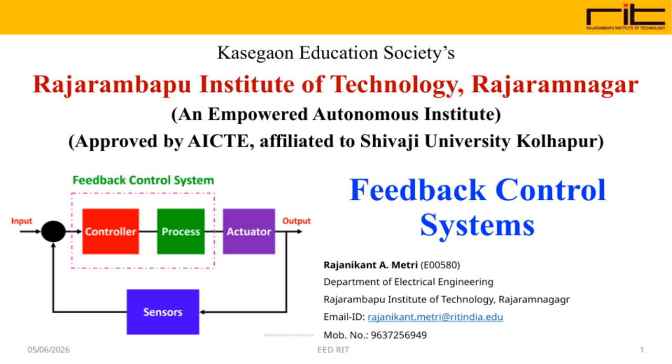Today, we're diving into control system engineering. It's a field that's all about designing and managing systems that keep things running smoothly, from simple thermostats to complex industrial processes. We'll explore the principles and tools that help engineers maintain stability, accuracy, and efficiency in these systems. This sets the stage for everything that follows in our discussion.

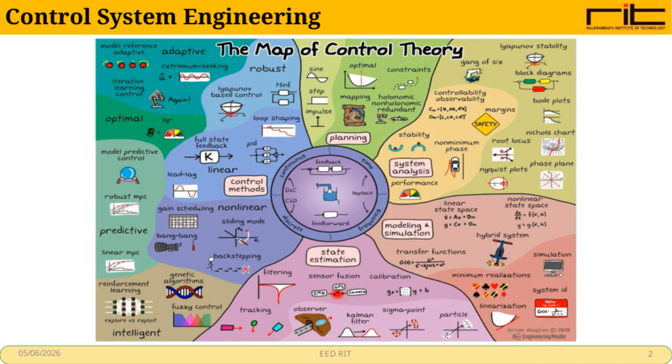Let's get started. In this session, we're diving into the core of feedback control systems. By the end, you'll be able to translate physical systems into mathematical models, a crucial first step.

We'll also calculate time domain specifications for second-order systems and analyze various systems using both time and frequency domain tools. You'll learn to compare different controllers and compensators and apply state-space techniques to understand complex MIMO systems. This foundation sets us up for deeper exploration ahead.

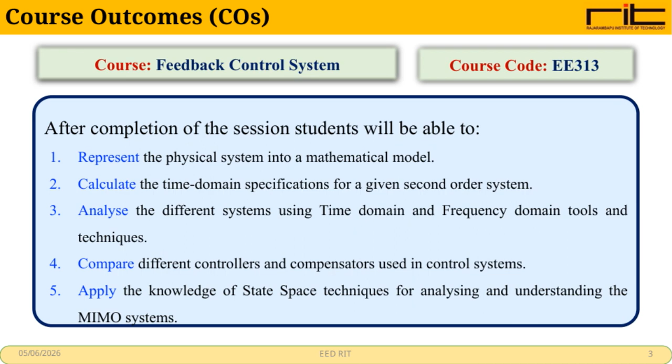Let's take a look at the course structure for our study on control systems. We start with an introduction, covering the basics, the importance of control systems, and key components like sensors and actuators.

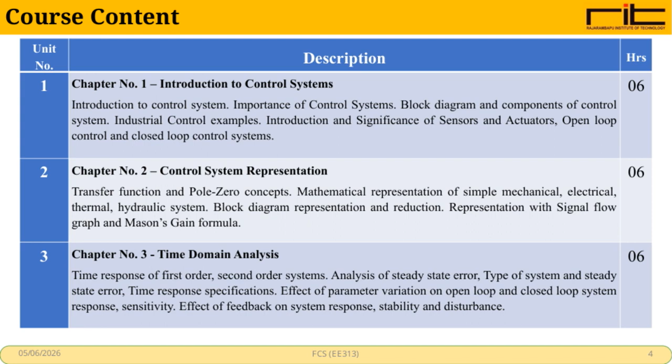Then, we move into system representation, exploring transfer functions and block diagrams. After that, we dive into time domain analysis, focusing on system responses, errors, and stability. Each unit is designed to build on the last, giving us a solid foundation over 6 hours per chapter.

Before we dive into these units, it's important to have a solid grasp of differential equations, Laplace transforms, signals and systems, and circuit theory. These topics build the foundation we'll rely on.

Now, we're covering 3 key chapters. First, stability, understanding how pole zero locations affect it, and tools like the Routh-Hurwitz criterion and root locus method.

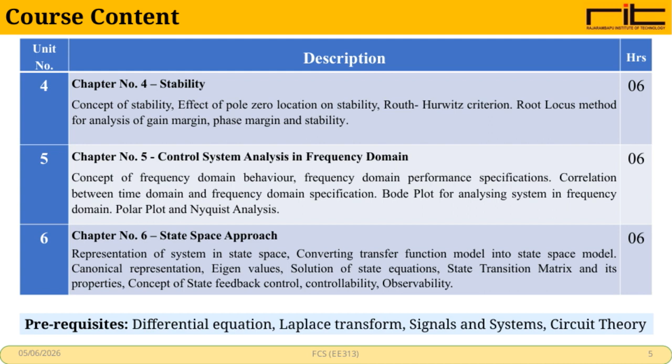Next, frequency domain analysis, exploring Bode plots, Nyquist analysis, and how frequency and time domain specs relate. Finally, the state space approach, representing systems in state space, solving state equations, and concepts like controllability and observability. Each unit is designed to give us 6 hours of focused study.

Let's talk about why control systems matter. They're everywhere, from the cars we drive to the devices we use every day. Studying them helps us understand how to make machines behave the way we want, reliably and efficiently.

It's about mastering feedback, stability, and precision. Whether it's robotics, aerospace, or manufacturing, control systems form the backbone that keeps everything running smoothly. So, diving into this field opens up a world of possibilities.

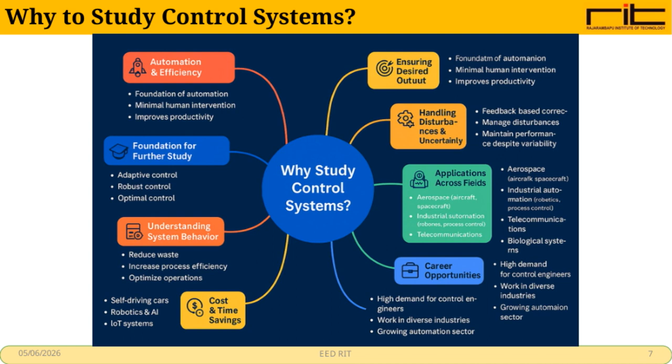Let's take a look at the industries where control system engineers play a crucial role. From chemical plants to pharmaceuticals, these experts keep complex processes running smoothly. They're also vital in aerospace and automotive sectors, where precision and safety are non-negotiable. Whether it's a PLC or DCS system, these engineers ensure everything operates efficiently and reliably across a wide range of industries.

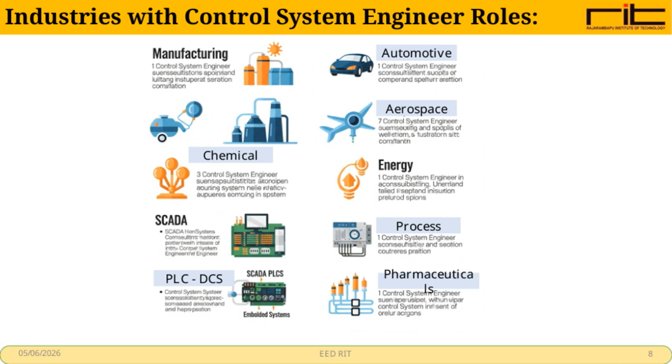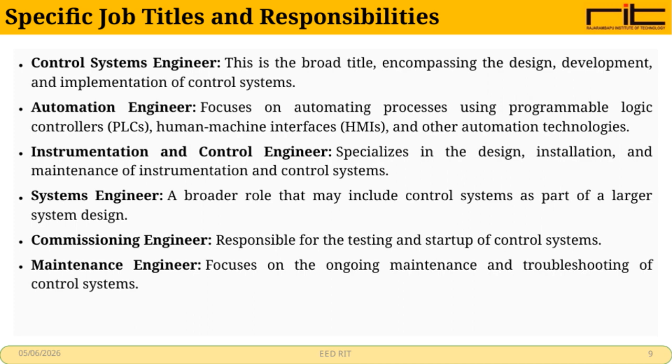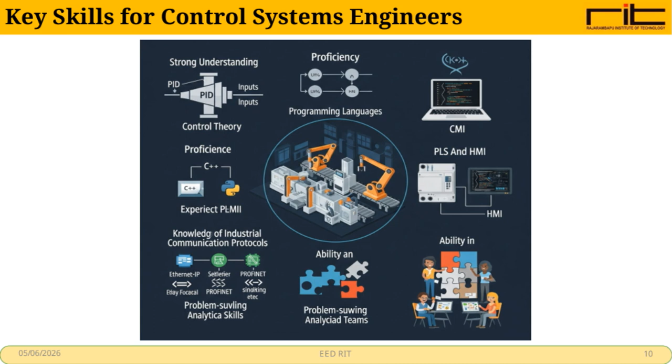Let's begin with Unit 1, an introduction to control systems. This is where we lay the groundwork for everything that follows. We'll explore the basic ideas behind how control systems work, why they matter, and how they're used in engineering. Think of this as setting the stage, getting familiar with the key concepts before we dive deeper into the details. It's the first step on our journey through the fascinating world of control systems.

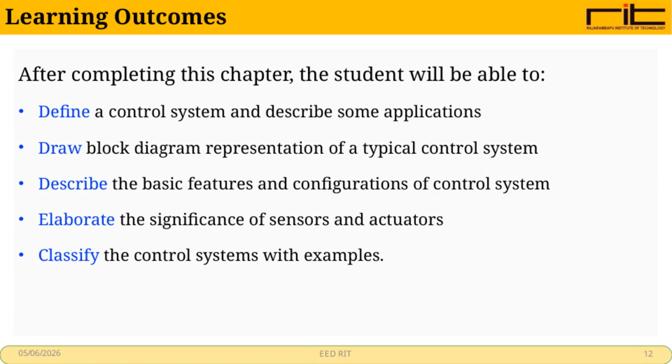By the end of this chapter, we'll have a solid grasp on what a control system really is and where you might see one in action. We'll learn how to sketch a block diagram, a simple way to visualize how these systems work. We'll also explore the key features and different setups control systems can take. Plus, we'll dive into why sensors and actuators matter so much. Finally, we'll classify control systems with examples to bring it all to life.

Let's start by outlining what we'll cover today. We'll begin with an introduction to control systems, what they are and why they matter. Then, we'll look at the basic block diagram and key components that make these systems work. We'll explore some real-world industrial control examples. Finally, we'll dive into sensors and actuators and explain the difference between open-loop and closed-loop control systems. This roadmap will guide us through the essentials of control technology.

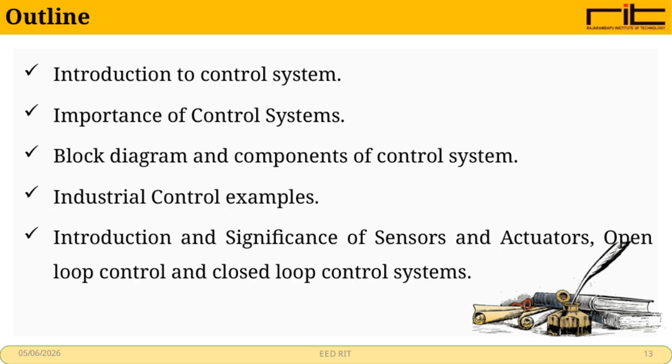Let's talk about control systems, the backbone of how machines and devices manage their actions automatically. A control system is any setup that regulates events or outputs to achieve a desired response. Think about everyday examples: traffic lights directing cars, washing machines running cycles, or thermostats keeping your home comfortable. It's also in advanced tech like cruise control in cars, anti-lock brakes, and even robotic surgeons. From simple switches to complex systems like PLCs and SCADA, control systems keep things running smoothly and safely.

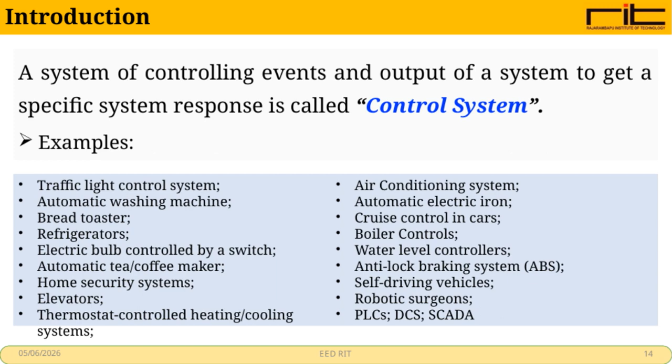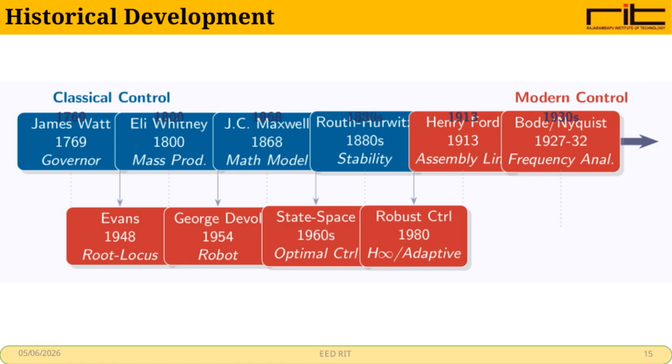Let's take a moment to look back at the historical development behind this project. Understanding where we started helps us see how far we've come, the challenges we faced, the breakthroughs we made, and the lessons we learned along the way. This context sets the stage for everything that follows, giving us a clearer picture of why today's approach matters so much. Let's take a quick journey through the history of control and automation.

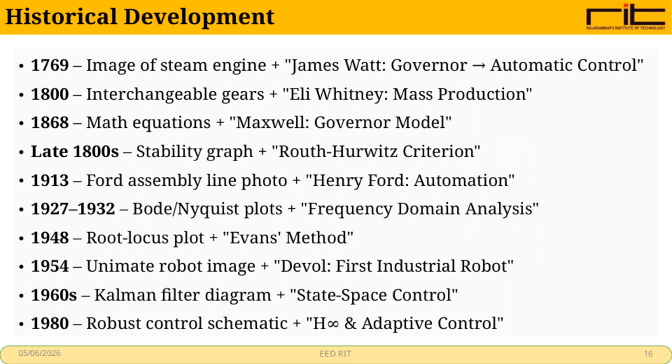It all started back in 1769 with James Watt's steam engine governor, an early form of automatic control. Then, in 1800, Eli Whitney introduced interchangeable gears, paving the way for mass production. Over the years, mathematical models and stability criteria emerged, like Maxwell's governor model and the Routh-Hurwitz criterion. By the early 1900s, Henry Ford revolutionized manufacturing with the assembly line. The mid-20th century brought frequency domain analysis, root locus plots, and the first industrial robot. Finally, by the 1980s, advanced methods like robust and adaptive control were shaping the future.

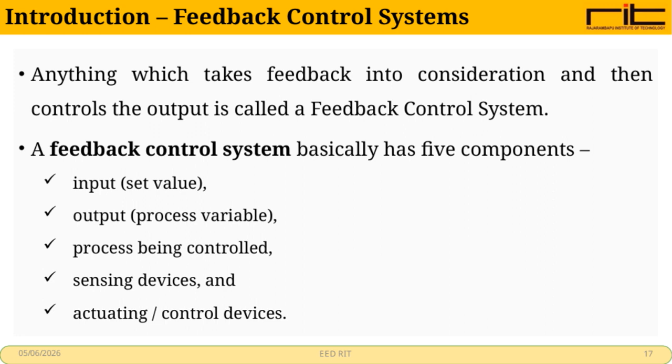Let's dive into feedback control systems. These are systems that adjust their output based on feedback they receive. At their core, they have 5 key parts. First, the input, that's the set value or the target we want. Then, the output, which is the actual process variable we're trying to control. Next, the process itself, what's being controlled. We also have sensing devices that monitor the output, and finally, actuating or control devices that make adjustments. Together, these parts keep the system on track.

Let's take a moment to introduce what's coming next. This section sets the stage for everything we'll explore today. It's all about understanding the essentials, the foundation we'll build on together. So, get ready to dive in and see how these ideas connect and unfold.

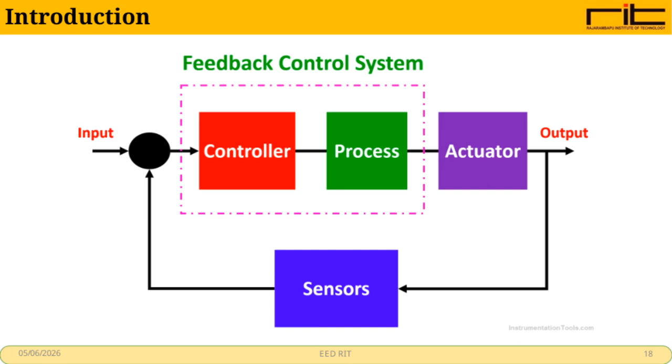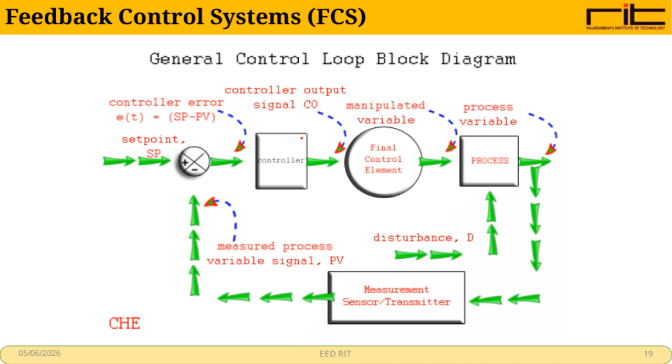Let's dive into feedback control systems, or FCS for short. These systems are all about keeping things on track by constantly measuring output and adjusting inputs. Think of it like a thermostat. It senses the temperature and switches the heat on or off to keep your room comfortable. Feedback control is everywhere, from engineering to biology, helping systems stay stable and perform as expected. Understanding this concept is key to mastering how complex processes regulate themselves.

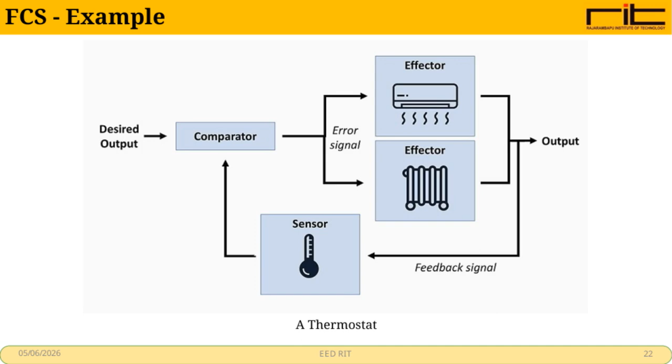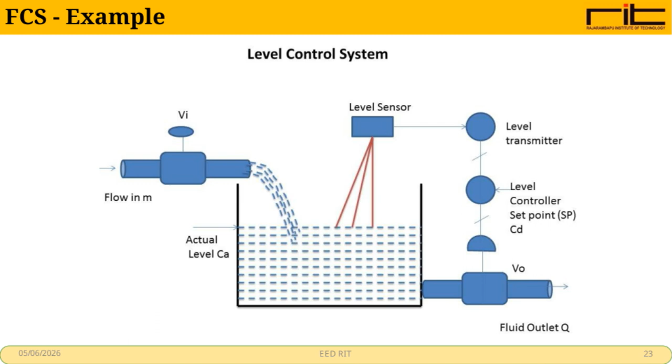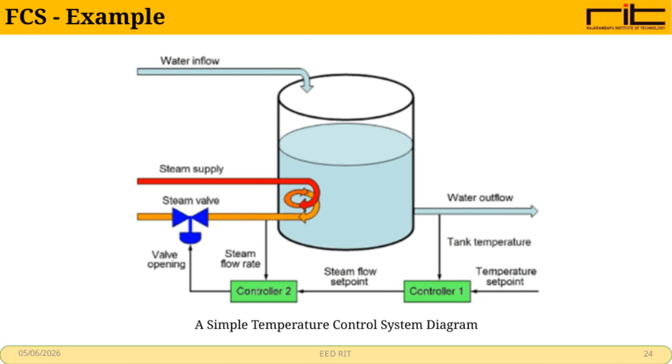Let's start by breaking down some basic terms we'll use throughout this talk. First, a plant, system, or process is basically a series of steps or activities arranged in order to control material and turn it into a final product. It can also mean any physical thing we want to control, like a robot, a car, or even a classroom.

Next, process variables are the physical quantities we track to understand how the process is doing, things like temperature or pressure. Measured variables are the outputs we monitor closely, using sensors to keep everything on track. Manipulated variables are what we adjust to control those outputs. And finally, the reference value, or set point, is the target we want our measured variables to hit.

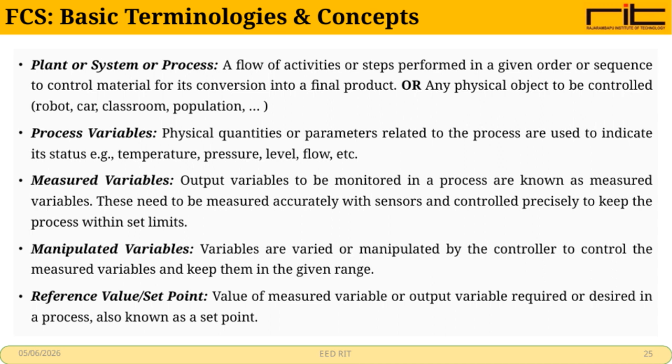Let's start by breaking down some key terms we'll be using. First, a sensor. It's any device that measures the size or intensity of something we want to control. It detects a physical quantity and gives us an output related to that measurement.

Next, a transducer. This converts the sensor's output into a form that's easier to work with, often turning it into an electrical signal. Then we have the transmitter, which sends this signal from the sensor over to the controller. Finally, error. That's the difference between what the sensor measures and the reference value.

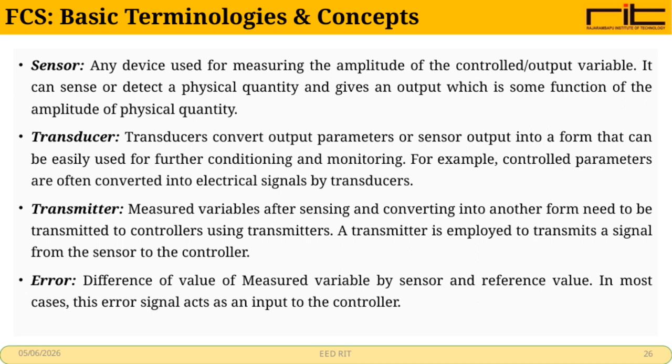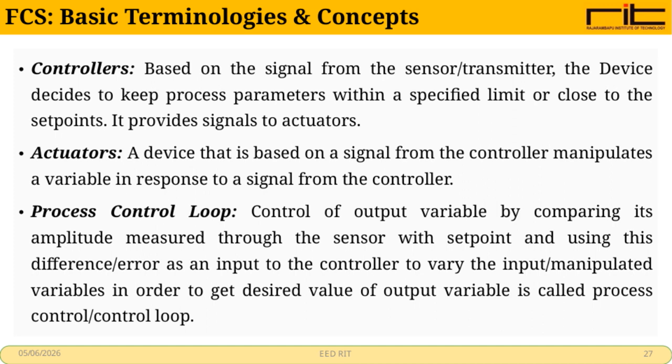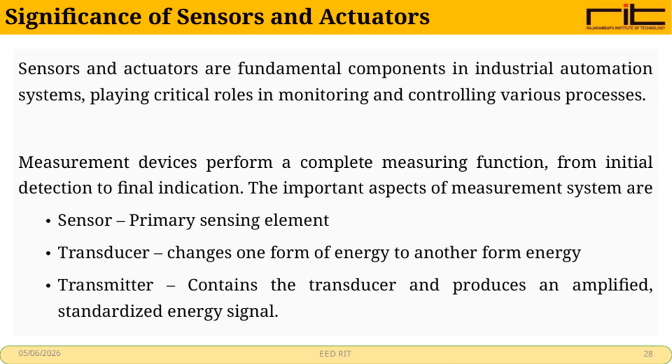Then comes the transducer, which converts one form of energy into another. Finally, the transmitter takes that signal, amplifies it, and standardizes it for further use. Together, these components keep complex systems running smoothly and efficiently.

Now, let's turn our attention to sensors. These devices are the eyes and ears of any system, gathering data, detecting changes, and feeding information back to us. Whether it's temperature, motion, or pressure, sensors help us understand the environment in real time. They're essential for making smart decisions, automating processes, and improving safety.

In this part of the presentation, we'll explore how sensors work and why they're so important to our project.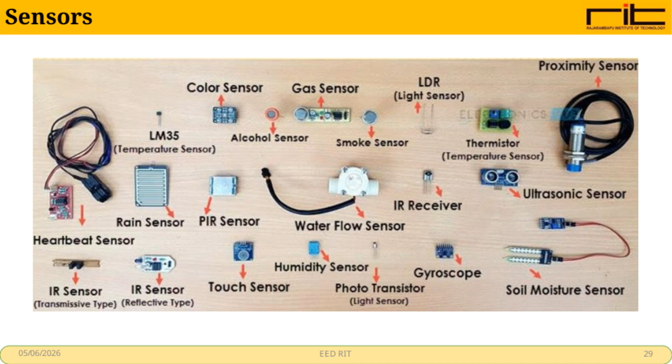Sensors are devices that detect changes in the physical world around us. They respond to inputs like light, heat, motion, or pressure, anything measurable. When they sense these inputs, they convert them into a usable output signal, which could be electrical, mechanical, or magnetic. Essentially, sensors translate real-world conditions into information we can use, making them essential for countless technologies we rely on every day.

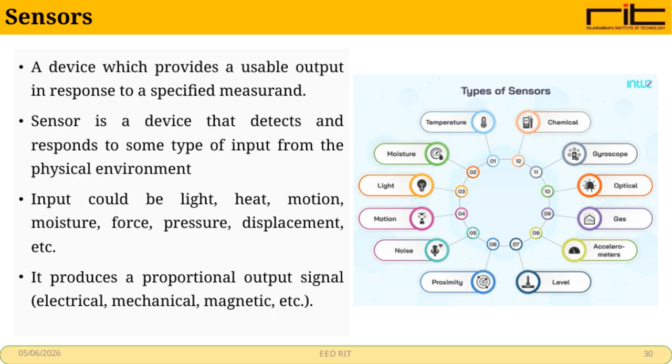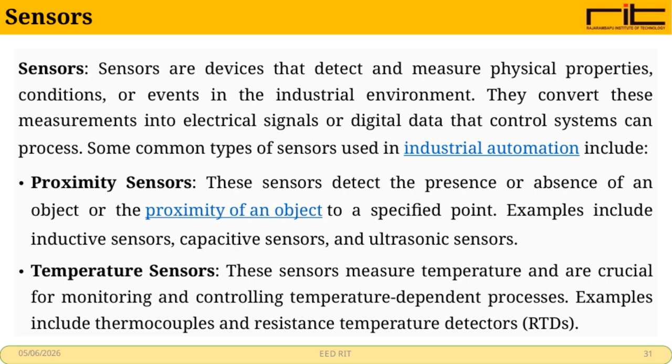Let's talk about sensors, the unsung heroes of industrial automation. Sensors detect and measure physical properties or events, then turn that information into signals machines can understand. For example, proximity sensors tell us if an object is near or not, using methods like induction or ultrasound. Temperature sensors keep a close eye on heat levels, which is vital for processes that depend on precise temperature control. Together, these sensors help keep everything running smoothly and safely.

Pressure sensors keep things safe and efficient by measuring pressure in all kinds of processes. Flow sensors track how fluids or gases move, helping us control everything with precision. Level sensors tell us how much liquid or material is in a tank, so we never run empty or overflow. Position sensors track movement and location, which is crucial for automation and robotics. And vision sensors use cameras to see, inspect, and guide, making smart manufacturing possible.

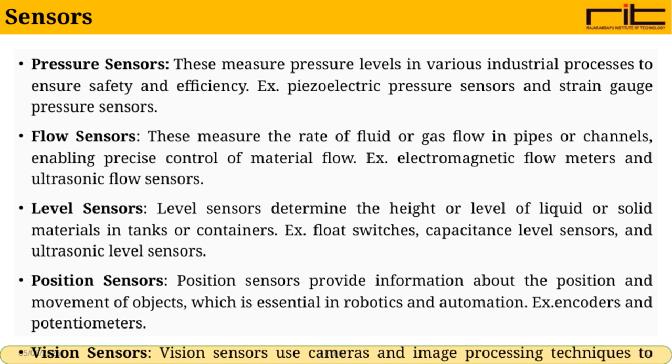Let's talk about actuators, devices that change something physical. They take electrical signals or electricity and turn them into mechanical energy. That means they can create motion, like moving a robotic arm, or cause changes in the environment, such as opening a valve or adjusting temperature controls. Actuators are the muscles behind many machines, making things happen when we send the right signals.

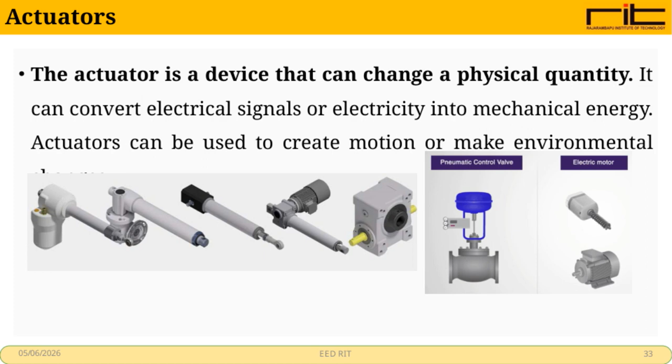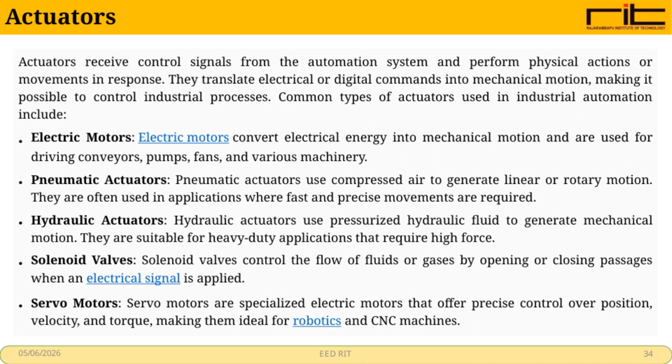Let's talk about actuators, the workhorses that turn control signals into real-world movement. They take electrical or digital commands and convert them into mechanical motion, making industrial automation possible. There are several common types. Electric motors drive conveyors and pumps. Pneumatic actuators use compressed air for quick, precise moves. Hydraulic actuators handle heavy-duty tasks with high force. Solenoid valves control fluid flow by opening and closing passages. And servo motors provide exact control for robotics and CNC machines. Each plays a vital role in keeping processes running smoothly.

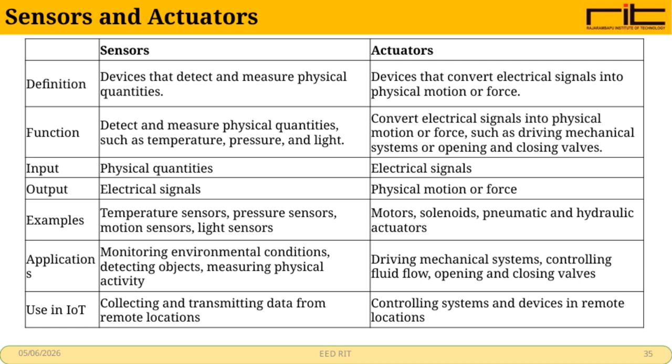Let's talk about sensors and actuators, two fundamental components in many modern systems. Sensors detect and measure physical things like temperature, pressure, or light, then convert that information into electrical signals. Actuators do the reverse. They take electrical signals and turn them into physical motion or force, like moving a motor or opening a valve. Together, they're essential for monitoring environments and controlling devices, especially in the Internet of Things, where remote data collection and system control go hand in hand.

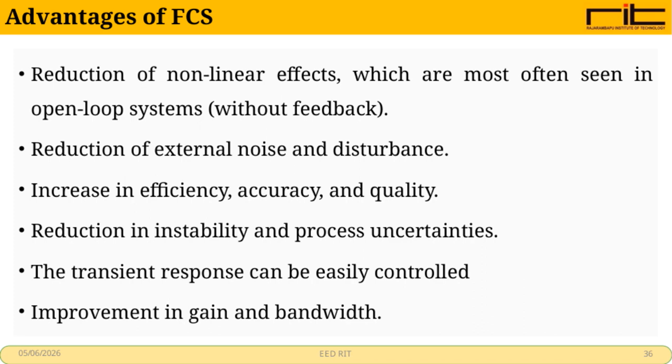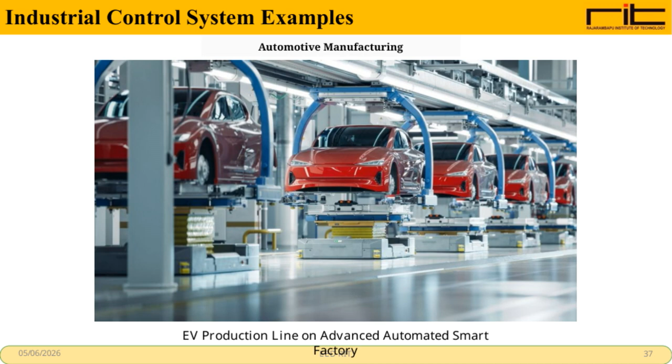Now, let's dive into the heart of our discussion, the EV production line within an advanced, automated smart factory. We'll explore real-world examples of industrial control systems that power this transformation. These systems are the backbone of automotive manufacturing today, driving efficiency, precision, and innovation. As we move forward, keep in mind how these technologies aren't just concepts, they're active, shaping the future of how electric vehicles are built.

Let's take a closer look at robotic assembly lines in automotive manufacturing. These systems are a prime example of industrial control in action. Robots work together seamlessly, handling tasks with precision and speed that humans can't match. This kind of automation boosts efficiency, improves quality, and keeps production running smoothly. It's a perfect illustration of how industrial control systems transform complex processes into reliable, repeatable operations.

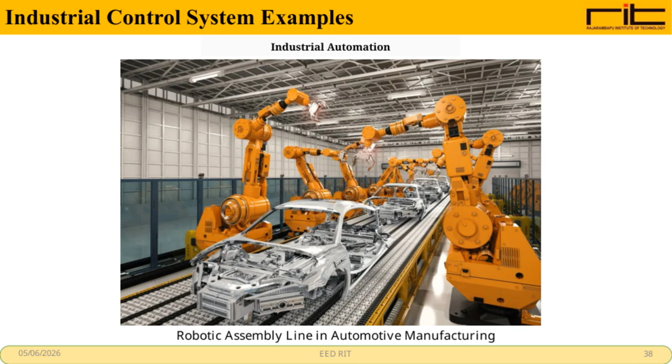Let's look at some examples of industrial control systems in action. Here we have speed control, the kind of system that keeps machines running at just the right pace. Then there's ignition control, which manages the precise timing needed to start engines or processes safely and efficiently. These examples show how control systems are the unseen hands guiding complex operations every day.

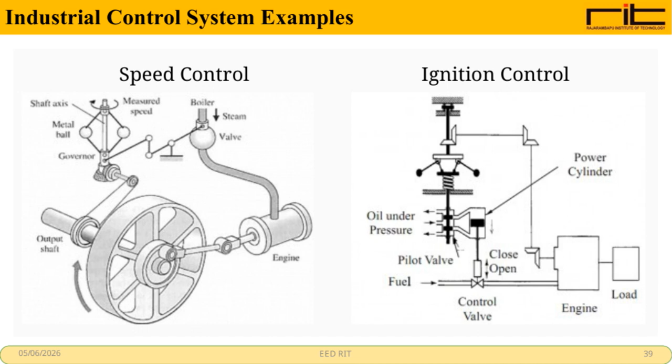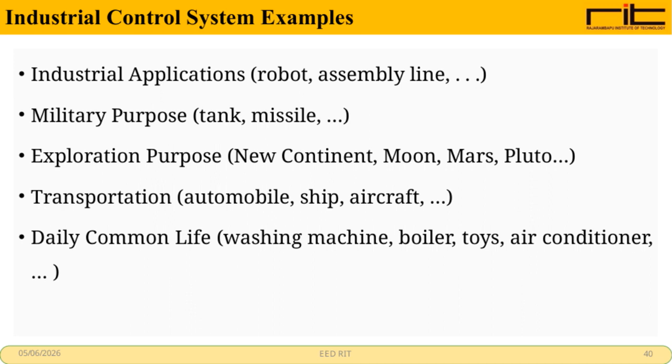Industrial control systems are everywhere, powering a wide range of applications. In industry, they keep robots and assembly lines running smoothly. In the military, they guide tanks and missiles with precision. They're essential for exploration too, whether that's on new continents or far-off places like the Moon and Mars. Transportation relies on them in cars, ships, and aircraft. And in our daily lives, they quietly manage devices like washing machines, boilers, and air conditioners. These systems shape much of the world around us.

When we talk about industrial control systems, there are two main types to keep in mind. First, open-loop control systems. These operate without feedback, meaning they don't adjust based on the output. Then we have closed-loop control systems, also known as feedback control systems. These constantly monitor their output and make adjustments to stay on target. Understanding the difference between these two is key to grasping how industrial processes are managed and optimized.

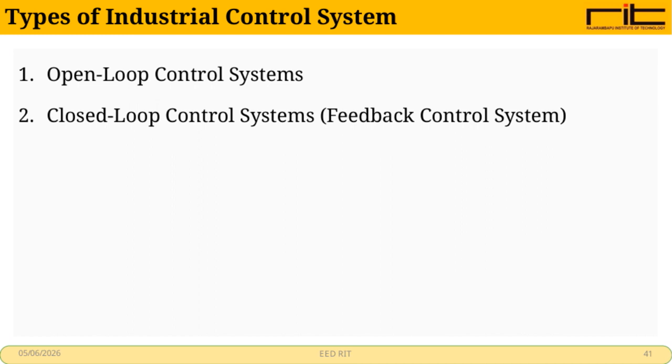Let's talk about open-loop control systems. These systems don't monitor their output to adjust their actions. The output isn't measured or compared to the input. The controller simply acts without feedback. Because the controller's decisions don't depend on the output, these systems are simpler and have fewer parts.

That makes them ideal when you don't need precise control or fine-tuning of the output. They're straightforward, reliable, and get the job done where precision isn't critical.

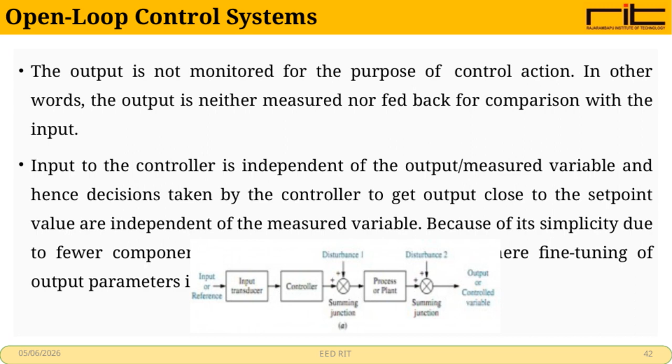Let's talk about closed-loop control systems. These are systems where the output actually influences the input, creating a feedback loop. This feedback helps the system maintain the desired output, even when disturbances try to throw it off.

Unlike open-loop systems, closed-loop systems automatically adjust themselves. That's why they're often called automatic control systems. They keep things steady by constantly correcting themselves. This feedback mechanism is what makes them so reliable and efficient.

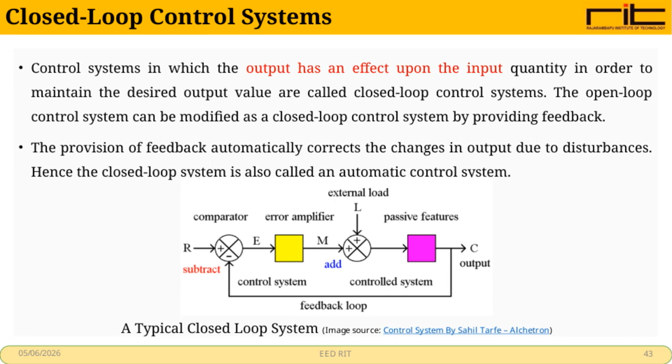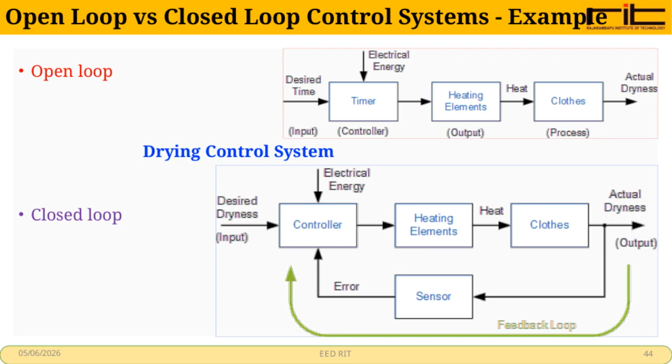Let's talk about drying control systems, focusing on the difference between open-loop and closed-loop control. An open-loop system operates without feedback. It follows a set process regardless of the outcome. Closed-loop systems, on the other hand, constantly monitor results and adjust accordingly. This feedback loop makes closed-loop controls more precise and responsive, especially in processes like drying where conditions can change. Understanding this difference is key to improving efficiency and product quality.

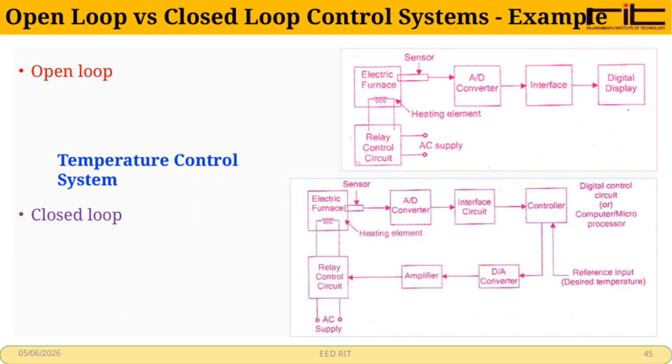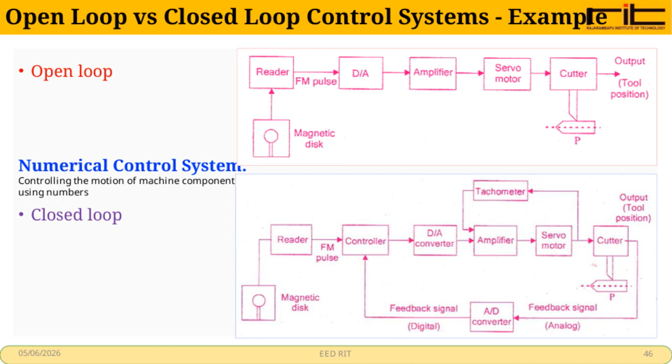This example shows the difference. Open-loop moves blindly, while closed-loop keeps everything on track. It's a key concept in precision and automation.

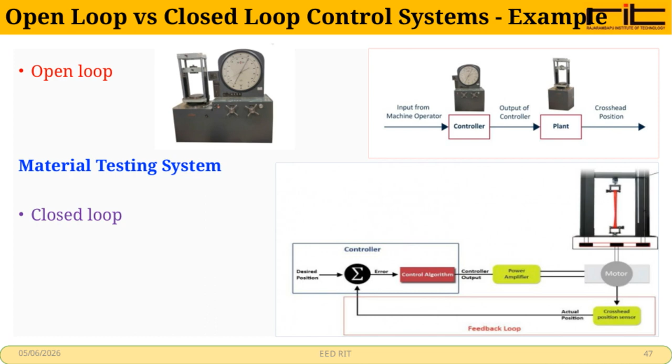This example highlights how closed-loop control can improve precision and reliability in testing materials. Understanding this difference is key to choosing the right approach for your application.